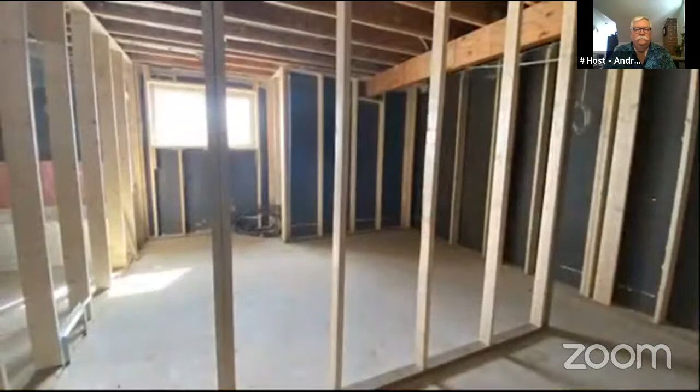The mechanical features that make this into a net zero house include primarily the building envelope itself, which includes extra insulation, a total of R34 insulation, a combination of R24 fiberglass insulation plus a foam insulation exterior to the house.

There's also an AeroBarrier sealant sprayed on the inside of the house to help keep air loss down to the barest minimum. I believe it's something like 1/10 of what the standard is for a house of this size.

There's also active solar generation on the roof, creating 16,000 watts of energy, which helps to power the electrically powered air-sourced heat pump, which heats the house as well.

The windows and doors of the house are also enhanced. The windows themselves are triple pane, gas filled and low E, so they don't allow a whole lot of heat loss or excessive heat gain through sun. The doors as well are triple point sealed so that they can prevent the most amount of heat loss.

Now let's go downstairs and check out the mechanical room, and we can see all the different systems that make this house net zero.

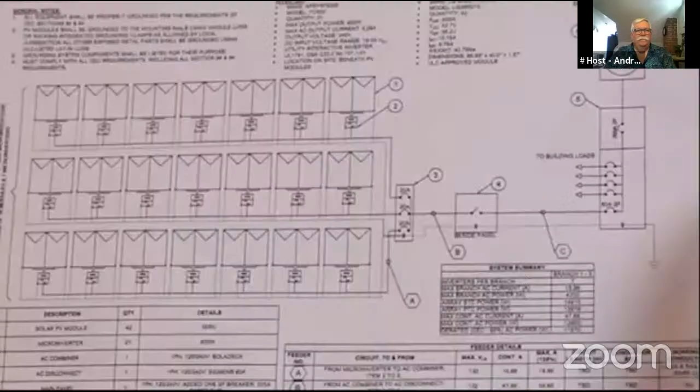As mentioned before, the house is powered by a 16,000 watt solar array, which has its own microinverters on it, so it can feed power directly into the house so that we can use it as it's being generated. This prevents you from having to buy batteries to get that off-grid usage. So you can still use some of your own green energy that you produce, but it will feed energy back into the grid as well for net metering.

The house uses a wastewater heat recovery system, where wastewater coming out of the house passes through a copper section of pipe, wrapped by another thinner copper section of pipe. So the water leaving the house when it's hot, for example when doing dishes with a dishwasher or taking a shower, forces hot water to leave the tanks, and new water coming in has to go around this, absorbing the heat from the water leaving the house, which prevents the hot water tanks from having to do too much work to reheat that water.

The hot water tanks are a hybrid heat pump system. The controller here is the heat pump that does all the heating of the water, and it uses the same technology as the furnace. It's an air-sourced heat pump which heats the water, and we use a second tank just for storage to create this hybrid overall system.

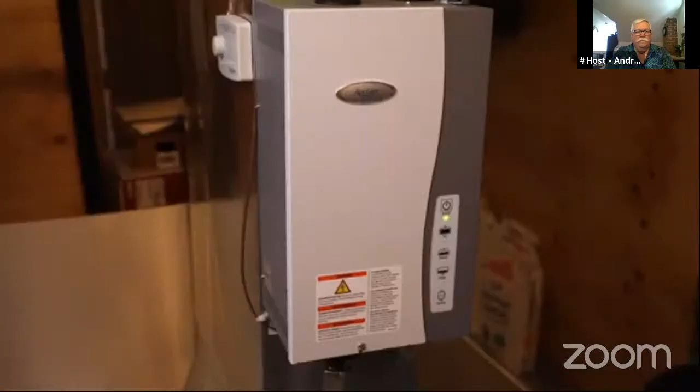For a humidifier, we use a steam humidifier that prevents us from having to heat the air as we're trying to humidify the house. That way the humidifier can run just with the blowers in the furnace, rather than having to fire up the furnace every time we want to humidify the house, which can save energy as well.

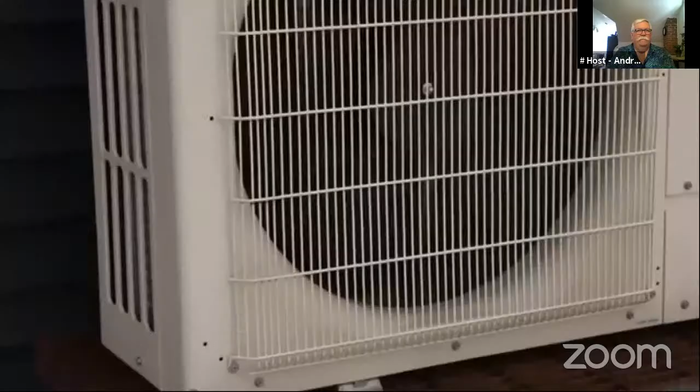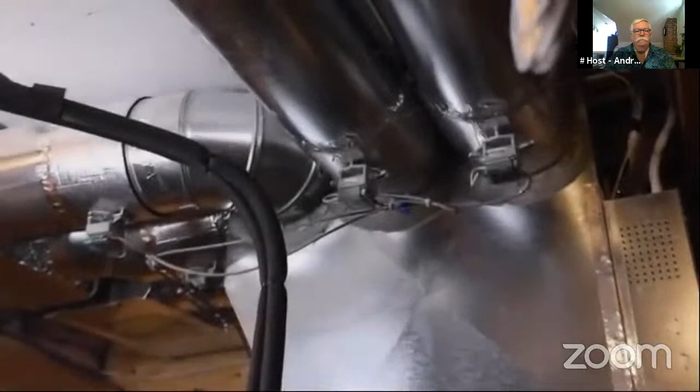The furnace itself is amazing. It's a heat pump done by Mitsubishi. These pipes run outside to a device that looks a lot like an air conditioner, and it basically draws heat from outside air using compression technology, gives those BTUs to the house, and feeds them up into the house through 3 different zones of heating to make it as efficient as possible.

With such a heavily sealed building envelope, with the aero barrier technology plus everything else that's gone into making this house airtight, you have to get fresh air in and out of the house. But you don't want to lose all the heat of the air that you've already heated up in the house. So we use this heat exchanger, this HRV unit, which draws humid, stale air out of the house and brings in fresh air, but it passes it by each other inside this unit in order to heat up the fresh air that's coming into the house. That way we don't have to heat it up again.

We put a lot of attention into the building envelope of the house to prevent air loss. For example, we have a double layer of drywall in the ceiling so that any light fixtures don't penetrate the envelope and allow air to escape out into the attic, as well as there's an R80 layer of insulation.

Another part of that is that we use a dryer that is a heat pump technology, so that it uses the same technology as the water heater and the furnace in order to dry the clothes, which is more efficient.

On top of that, it vents to this room. We didn't want to put a hole in the exterior wall, again, to prevent air from getting out. But because that air ends up in this room and this dryer needs dry, cool air in order to dry the clothes, we had to install a vent from the HRV system in this room, which will draw this humid, hot air out of the room during the summer months when we don't really want that air in the house, as well as to provide dry, cool air to the dryer so it can function the best way.

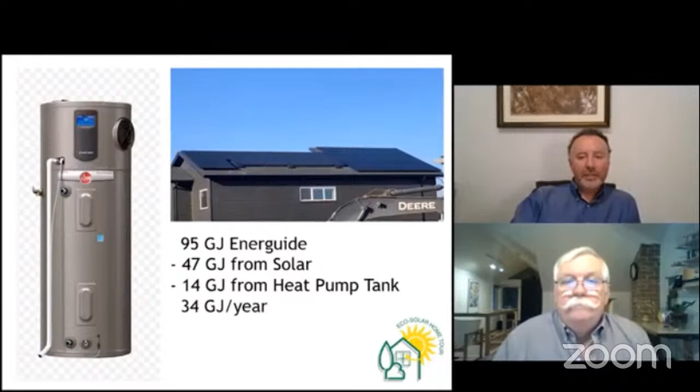We're hoping to add a cold climate air source heat pump like the Mitsubishi Zuba, and we're looking at potentially double insulating some walls as we create feature walls. That should bring us in towards the net zero point.

Okay, interesting. Let's take a look at some of the other features of your home. What would you say is the standout feature? I would say that would definitely be the solar panels.

It's quite apparent as you're approaching the house from the south side when you see all the black panels on the roof. We maxed out the entire south-facing roof - it's not possible to fit a 34th panel on there. We were keen, we have an EV, so we knew we'd have a significant electricity demand.

On a hot summer's day, or a sunny day in late June, early July, we can get up to 75 kilowatt hours in one day, which is over 500 kilometers of driving in the EV. So basically it's like getting a free tank of gas from the roof of your house on a sunny day in the height of summer.

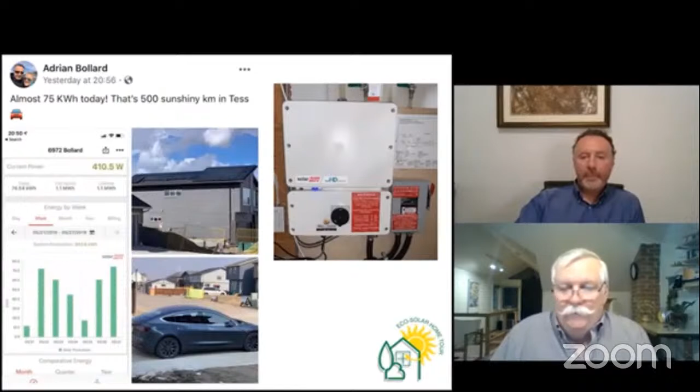Interesting. So when we build energy efficient homes, we make a series of choices. What would you say were the main choices you made as far as energy efficiency in your home? The likes of triple glazed windows was something we were keen on.

That was one of the reasons we moved forward with Excel Homes. They put in the NEMA 14-50 charger in the garage for us, added extra insulation in the attic, and we put in underslab insulation, which they didn't do as standard practice. We also put in double cellular blinds, which I'll come to - that really adds to it, almost doubling the insulation of the triple glazed windows.

And there we can see Skyfire Energy installing the solar panels. That was a couple of years ago at this stage, still pretty early in your housing development there.

Exactly, yeah, actually it's been really built up in the past six months. It's amazing just how much development's been going on around us.

We have a 4-inch air filter in the furnace, which really helps make sure the air is dust-free, and it's almost HEPA quality, the filter that we've gone with.

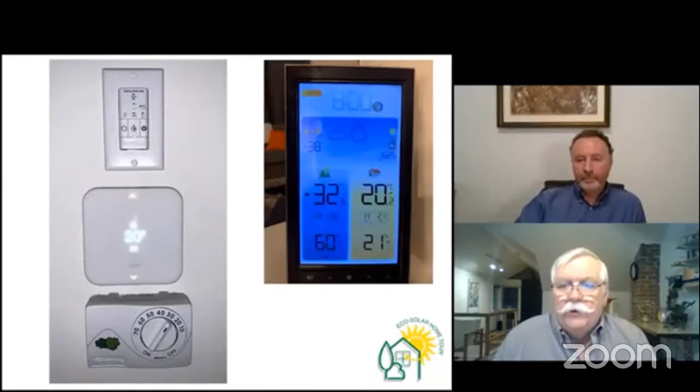Interesting. Another important area for savings is water costs. Are there any features of your home that save on water costs? Yeah, the builder supplied a very efficient toilet - it only uses about 3 liters per flush, and they work really well.

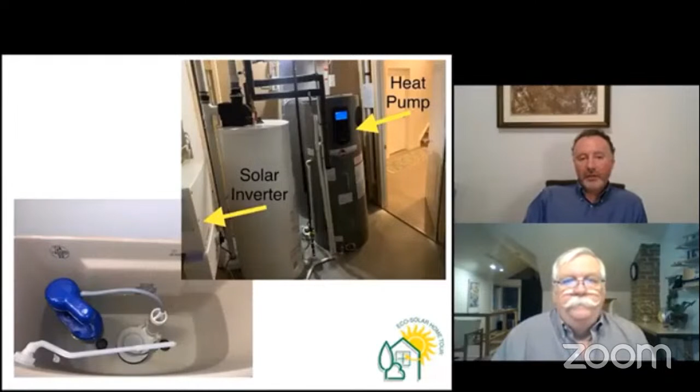On the heat pump hot water tank, we have a preheating hot water tank which really accounts for like 99% of the hot water heating. That's scheduled to work during peak solar hours, and it heats the water to 60 degrees Celsius before it goes into the traditional gas tank.

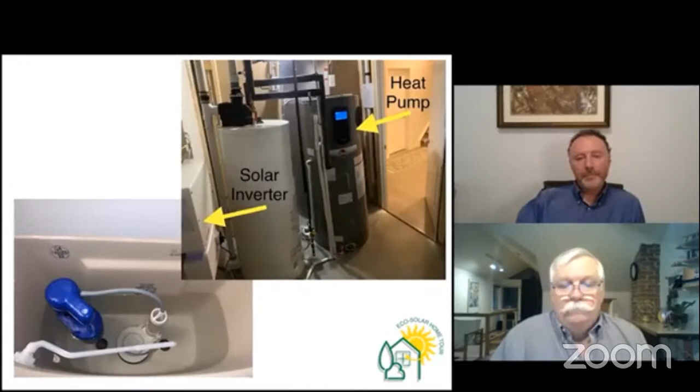That really rarely has to kick in because it's getting hot water that's already near the temperature it's set for. So the vast majority of our water is coming from the heat pump hot water tank, which in turn is solar powered.

Are there any other features of your home you'd like to tell me about? Sure, one of the easiest things people can do is add honeycomb cellular blinds. They add a value of R3 to a typical window, and we have triple glazed windows behind that, so we're really up to R6.

We added some PVC stripping to the sides to make sure the blind was as airtight as possible, which also helps reduce condensation building up on the windows behind, because there's not a flow of fresh, moist air getting in behind it. It's relatively cheap, and it's one of the best ways to control what was basically a window, the soft spot in any exterior building envelope.

When you can add something like a honeycomb blind, it's really an easy and efficient way to almost double the insulation value. I could use some of those in my home. Yeah, highly recommend them.

Another product we added, you can pick one of these up at Home Depot or Lowe's, is just a window blind that you can add to the glazing of your front door. They come in all the standard sizes that window glazing comes in. The door was traditionally just a double glazed window, but by adding this blind, it comes with its own Perspex glaze layer on the inside as well.

So we're really making the double glazing triple glazed, plus we're adding that blind layer, which, if you close the blind on a minus 40 day, creates another air barrier where you've got two levels of air before you get to the double glazed window.

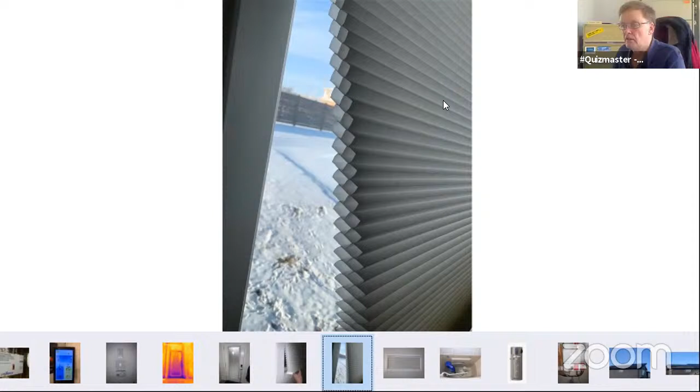I'm always quite fascinated with blinds. Did you put them on the inside of the window, I guess, then, are they? Exactly, yeah.

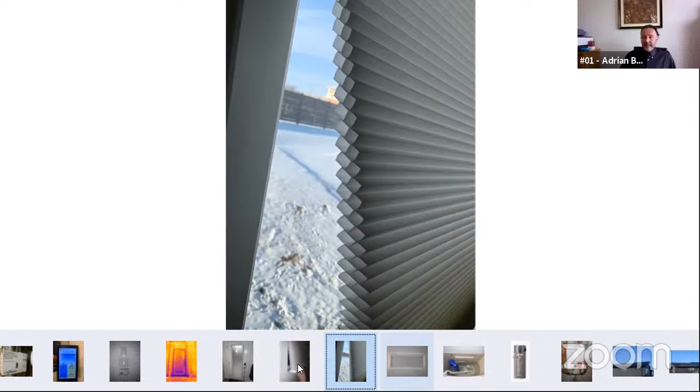How do they respond to high humidity levels in the wintertime with respect to condensation, ice, frost buildup, potential ice buildup causing them to stick, things like that? Well, there's two ways of dealing with condensation on windows and blinds. Number one is to open the top and bottom to let a warm airflow get to the window to keep it warm and less likely to condense. The other way is to make it as airtight as you possibly can behind the blind.

We've decided to go the airtight way, so on a -30 day, we can keep the blinds fully closed. We sealed the top side with tape, and sealed the sides with PVC stripping — maybe a 5 mil and a 3 mil size, whatever size we could make fit, and stuck it in at the sides. If you look at that blind in the screenshot, you can't see any air pockets getting behind the window blind, and there's only a minimum amount of air behind it, so you get very little condensation on the window. Any condensation there will condense, but it's not being refreshed with more moist air on a consistent basis, since the air is blocked out. So you either go with open blinds or seal it fully, and the sealed-fully approach actually works really well, giving you the full insulation benefit on the very days you need it.

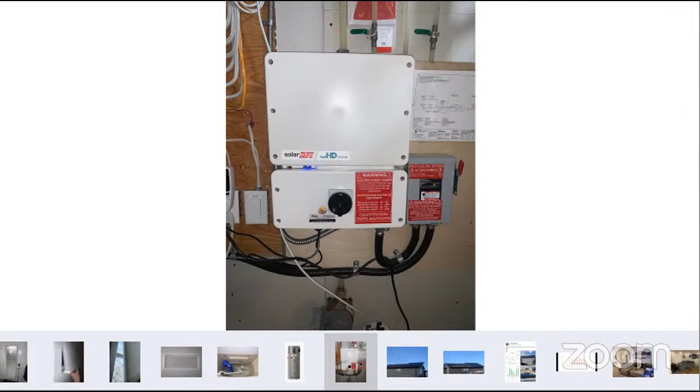Sure. Basically, we're with a solar club with our provider, Camrose Energy, and the solar club is fantastic. It gives you 26 cents a kilowatt hour when you're exporting over the summer months, and we export for 6 months of the year. Then for the winter, when we start net importing, we go down to a lower standard rate of 6 cents a kilowatt hour. So this really helps us build up a surplus in the summer, and our electricity bill can actually fall to zero in the middle of the summer.

And that's including charging our car to run maybe up to 4,000 or 5,000 kilometers a month, heating all our hot water, and running the house. We have a bill of zero from all those different charges that a typical household would have in terms of gasoline, natural gas, and electricity. Which is great.

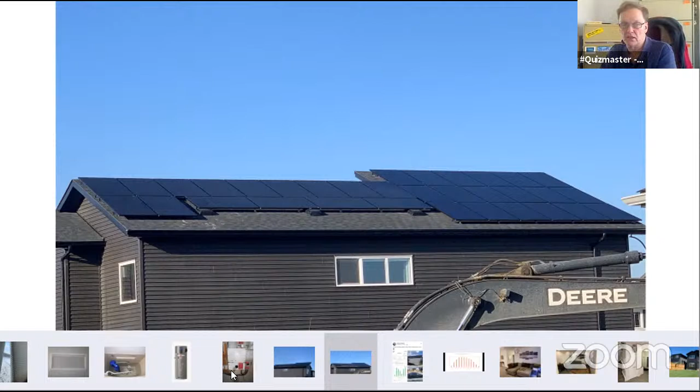So one question came in: when you were talking about your inverter breaker, does that mean the inverter breaker for the calculations is considered a supply at 40 amperes and also a load at 40 amperes? I'm no expert in that, but as far as I know, it's just a 40 amp breaker that goes to the SolarEdge. I guess that could be 8 kilowatts going out onto the grid from the inverter, or if you had that EV charger connected to it, you could be drawing the 8 kilowatts from the SolarEdge. So it's just using that 40 amp breaker on your panel if you're restricted on your panel.

That's a good point. So my response to that question is yes, that's what it means. It can be considered a supply of 40 amperes at some point and a load of 40 amperes at others, and then we would consider them separately in terms of doing the calculations, which is fine. It's not hard to do at all.

I do have one more question, if I may. It says, can you upgrade a 30-year-old house, and how much would it cost to upgrade, especially the solar electric system on the roof? Is there any subsidy available? Do you have a response to that at all?

Yes, certainly. The federal Greener Home Grant that just came out is offering up to $5,000 towards a solar system install, so that could be applied against all the costs of putting it in. Even a 30-year-old house probably has a 100 amp connection, so from that perspective, it's unlikely that you necessarily need to upgrade your panel if you already have a 100 amp connection.

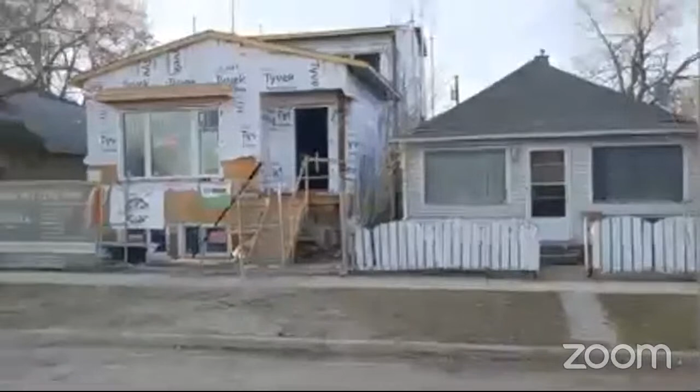If you look behind you here, this is our school, which is kind of our main view. They're currently facing south. We chose that to try to have constant south exposure for solar, and we're hoping the zoning keeps anything from being built here in the future that would block our sun. As you can see, the two units are staggered. The front unit is where my mom will be living, and we've staggered it so our back unit is higher, so we both get solar capture.

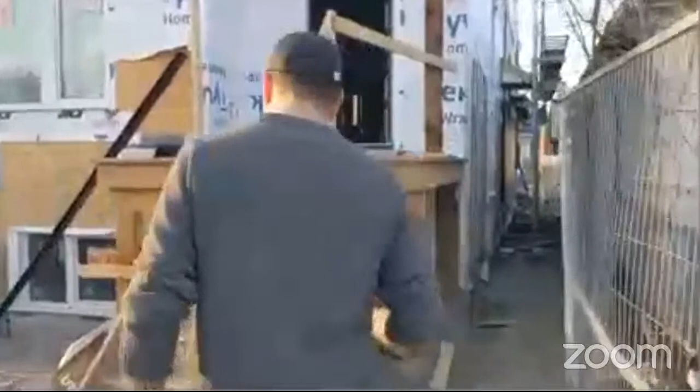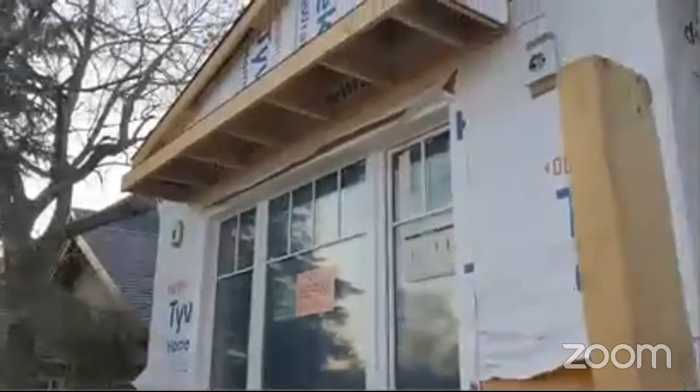So you can see here one of our awnings, for some shading during the summer months for these big south-facing windows. Here we have an Innotech door. This has a multi-locking function so we can get a tighter air seal. We're going for passive house low energy certification, so that means we have to beat 0.6 air exchanges as well as some energy use guidelines.

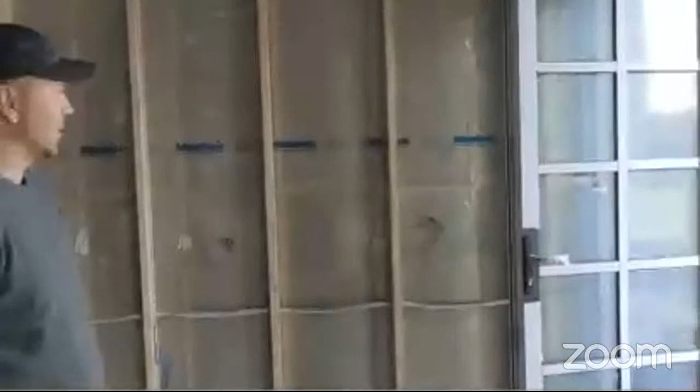Over here we have the Innotech temperate climate passive certified windows, I believe they're called. This one opens for some passive cooling. These are the main south-facing windows.

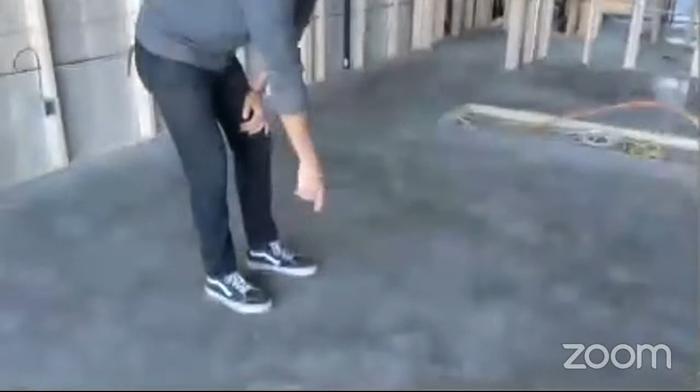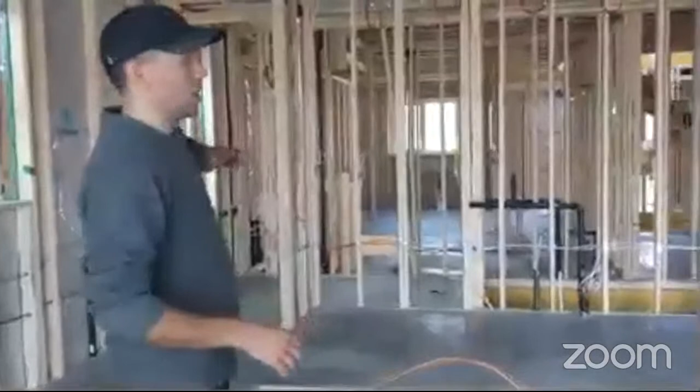That front, south-facing unit will be heated through here and soak into these concrete floors. There's concrete floors on every single level throughout the entirety of the house. This area will be her living room, kitchen, and a water closet. We've designed everything in the house so the main solar capture areas are where people spend the most time, to get the best efficiency out of passive lighting and make the spaces a little more enjoyable.

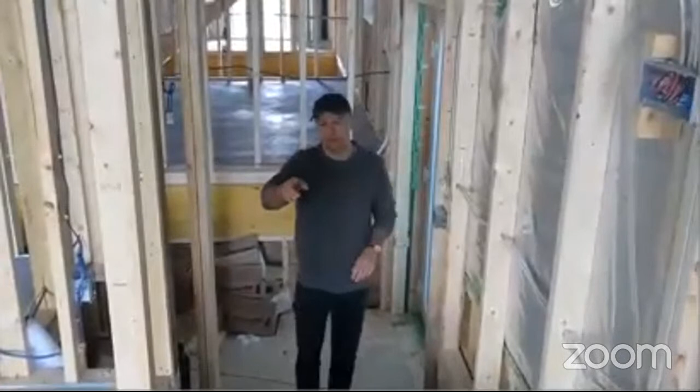So if you come with me, this will be her main entrance. That's gonna kind of be a deck area, but we have to have a front door for the look of the house. But this will be the area that she uses the most to enter.

So we have a closet here, again another Innotech door. We've separated the doors so that our unit to enter will walk down that way, and her unit to enter will walk down this way, just to give us a little bit of privacy. Because the privacy for us as multi-generational living is fairly important.

So this is where you kind of get into our unit. Luckily there's no drywall here, so we can see that right now. But as I walk you down here, we're gonna be walking down these stairs, then through the basement, and then we'll be coming up those stairs over there, and then going up those stairs to the top, just to give you hopefully some degree of understanding, since you can't be here in person.

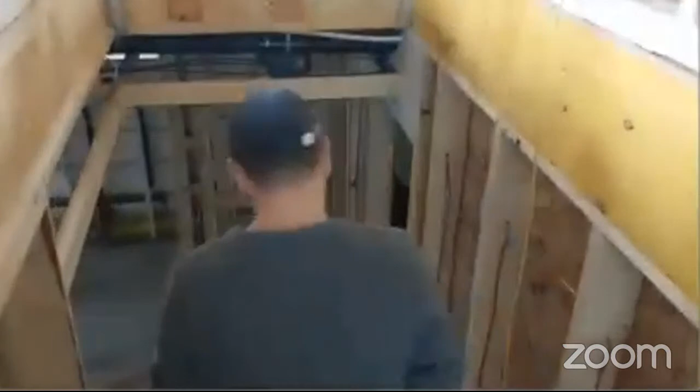So if you come on downstairs, this area here will be her main bathroom.

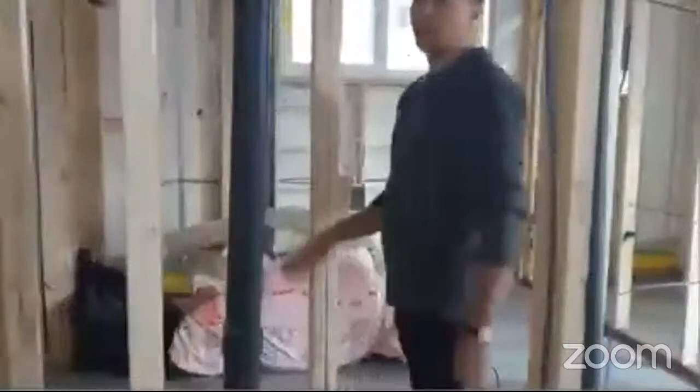And over here will be a mixture of a spare bedroom, an office, and potentially another TV room. So we tried to make some of the areas multifunctional in order to save both on the materials as well as the cost. So any area where we wouldn't be using more consistently, we tried to make into a multifunctional room. So that one's kind of hers, as well as the storage space and office over there.

This is her master bedroom. So again, with the passive lighting, anywhere that we would be spending quite a bit of time, we've tried to have on the south side of the house, or at least have a little bit of extra passive lighting. This area also solar captures for her, and then this will be her walk-in closet area.

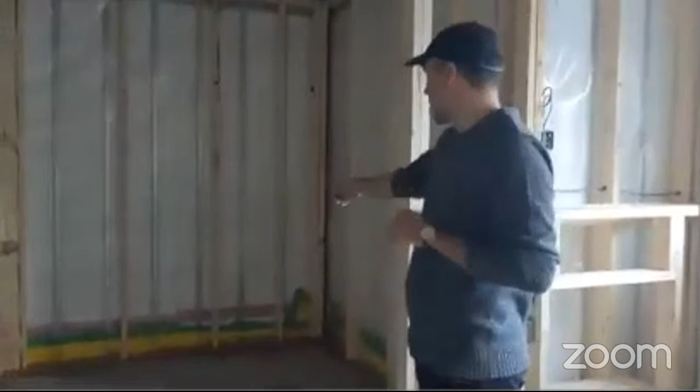And then if you come this way, so in here we have a shared utility closet. I'll try to move into an area maybe where you can see me a little better. So we'll have a shared utility closet here.

That's to reduce some of the costs for some of the expensive things. So we'll have a Sanden hot water, heat pump hot water tank, I believe, here. That's gonna feed both units for hot water. It's got a little bit better energy usage out of it. We have Lifebreath HRV.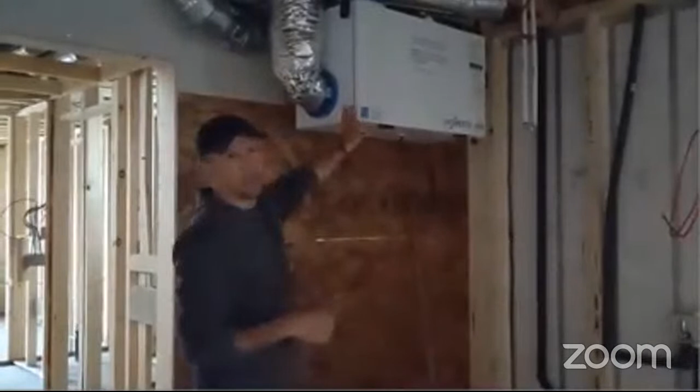This unit feeds my mom's area. We have one over there as well. And then a shared electrical panel. So this will serve as a storage room, potentially a workout room, but also a shared utility closet.

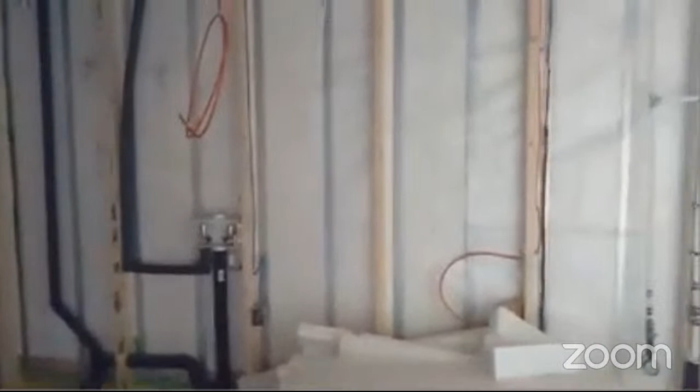We'll have a shared washer dryer here with a ventless dryer because we can't vent out of the house for the passive house design. And then this will be the sound insulated wall right here. And then our solar hookup will be over there next to the panel.

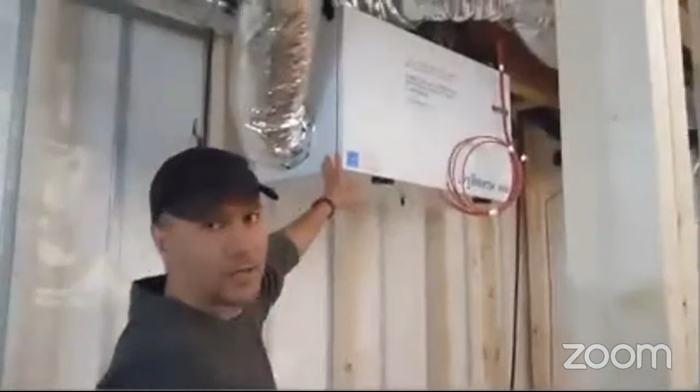Nothing too exciting down here, except for I'll show you the wall system here, which is the real part of this house. Now, Axel has another much more professional video surrounding this, but for now I'll just give you a brief description.

We go to the structural component. Everything is structurally on the outside of the house so that we could keep better thermal, or keep thermal bridging from happening. And then we go to a timber frame.

This has 3 studs. So this is an internal utility stud. This is the actual structural stud. We have blown cellulose in the walls here, and then another stud on the back of this. But again, yeah, Axel will have a much better video on that portion in a little bit here.

So if you continue with me upstairs.

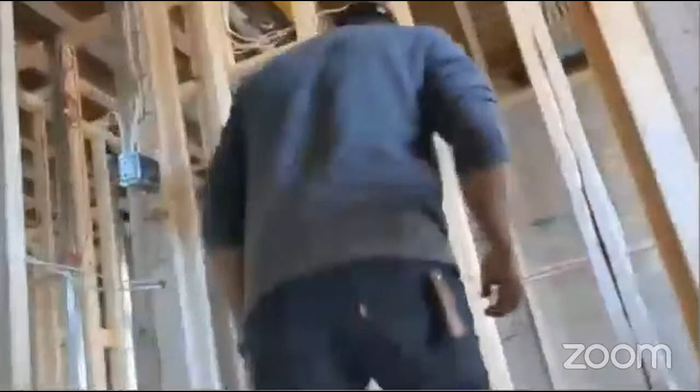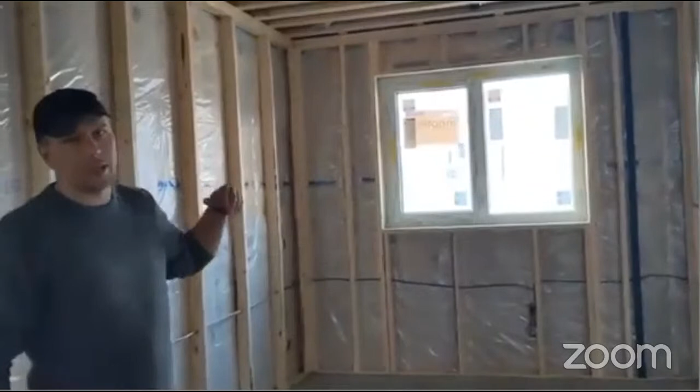So again, concrete on every level. We're kind of back where we were before, but this will be our master bedroom. We have a north-facing window here to get a little bit of passive lighting, so we hopefully can use a little less light.

Everything in the house, there's no gas hookup whatsoever. So everything will be electric throughout the entirety of the house. So we've tried to be cognizant of where we put windows that provide us some lighting.

We also have a window here that opens to get some passive cooling throughout this area, since we'll be sleeping in here. And then you have our master bathroom over here.

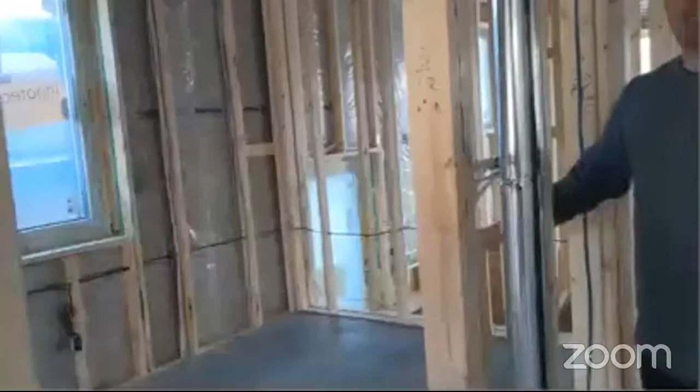Nothing too exciting in this area. And then over here is our spare bedroom. We'll also be using this as a closet, though this has been kind of planned for a closet later as well in our master bedroom. But this area has been planned for a closet as well as a spare bedroom because, again, any areas where we wouldn't use as often, we've tried to make multifunctional.

So if you come to our entrance here, currently you're looking at me south. We're going to be spinning to the north. So we'll be entering through the north of the house. This is our main entrance for the back unit.

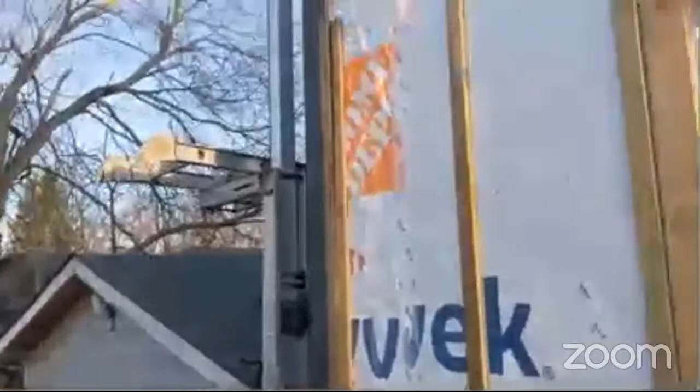And out here we have, again, another Internorm door. Here we'll have all the rainwater from the entirety of the house captured off of the roof systems. It'll be piped down through the side of the house, and then it'll come into some water barrels or water cubes that sit on top of our deck here. And we've raised it on the deck to get a little bit of pressure to feed the garden from it, using kind of gravity fed systems.

So this area back here will be a mixture of a food garden and native vegetation to try to reduce the amount of water or allow us to actually make food for ourselves. But this will be a shared area for the front unit and the back unit. And then if you come inside, we'll go up to our top unit.

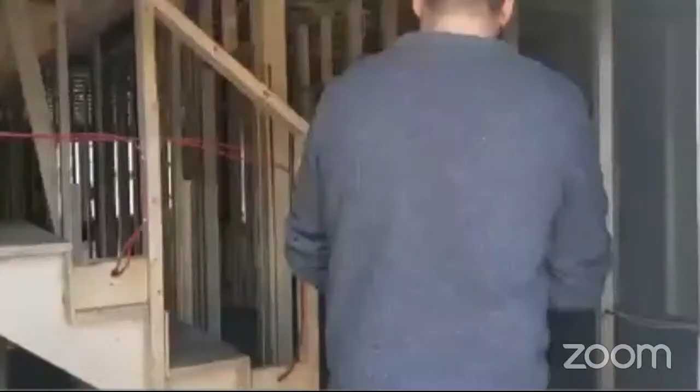So again, everything up here is timber framing with blown cellulose. We have concrete floors, and this area is going to be our main solar capture area. So that's why we have these big south-facing windows.

So this will be our kitchen over here. That window doesn't open. We have a water closet over there with a window that does open. And then we have a window that opens here and a window that opens here, again to try to get that passive cooling.

You can see here the tilt and turn function of these Internorm windows, so we control the amount of passive cooling that we get. So this one and that one.

And then if we go out onto the deck here, you can really see the staggered design here because this is my mom's roof.

And now I'll take you up to see the area where the solar is planned. So hopefully I'm getting the right shot here, but you can see now this area up here, the peak of the roof has been set back so that we can get as much south-facing slope as possible.

So that entirety of that roof will be loaded with solar panels, and then this east side will be loaded with solar panels. In total, it should be about a 15 kilowatt system, we estimate right now.

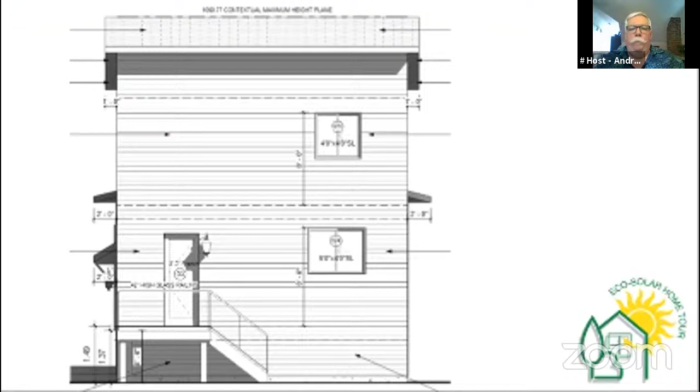Yeah, that's right. Sorry, I think my video's off, Andrew. I think I need... it'll come. Somebody has to do that for you. Gotcha.

This is really interesting to me. We've only seen this once before on the tour, in Edmonton last weekend. This is a special type of basement construction with steel studs and styrofoam. Glenn, do you want to tell us what that is, and please define the acronyms you're using?

Still says my video's disabled, but Axel's here with me, so he can get into the technical. So what's this system called? That basement system is the SI foundation system. I believe SI is for super insulated. They're out of Edmonton, and that wall is an 11.25-inch thick wall system.

There's 6-inch structural steel studs to the inside face of that wall, so there's an added 5.25 inches of EPS on the outside of that stud face for a complete thermal break through that wall system.

So the benefits of this wall here are not only from a greenhouse gas, or GHG, target, but we don't use any concrete in the wall here — it's just in the footing. So that's a lot of concrete to not be pouring in your house.

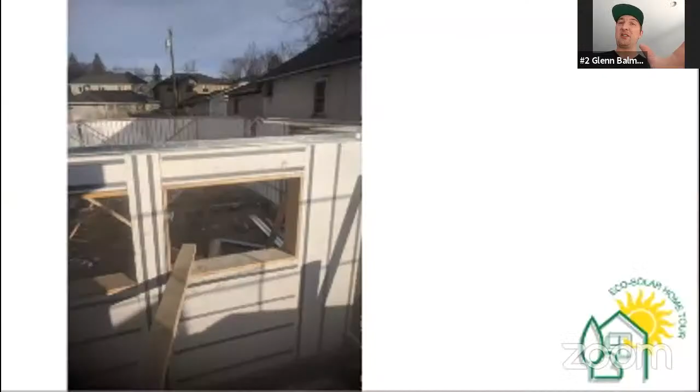Also in terms of a space saver, the 11.25 inches is entirely made up of insulation other than the structural steel studs. Having an 8-inch site-cast foundation wall, you lose a lot of space with very minimal R-value with a typical foundation wall there.

On the picture you're showing, on the outside of the wall you get these little PVC nailing strips, and those nailing strips are to help side your house with.

Now, how do you seal this foundation — this expanded polystyrene — how do you seal the sections together?

So the sections come in 4-foot sections, basically just like great big Lego blocks. There's a steel track that gets bolted to your concrete footing, which has to be poured extremely level, because you're playing off the level of that footing. That's one of the tricks to the process — pouring a level footing.

So you bolt a metal track to that footing, then put the panels into that track and screw right into them. That connects the bottom, and then there's a Z track that goes on top of the wall. This Z track fastens to the front face, and a 2x6 goes into that Z track and fastens in, and your subfloor gets attached to that 2x6 sill plate on top.

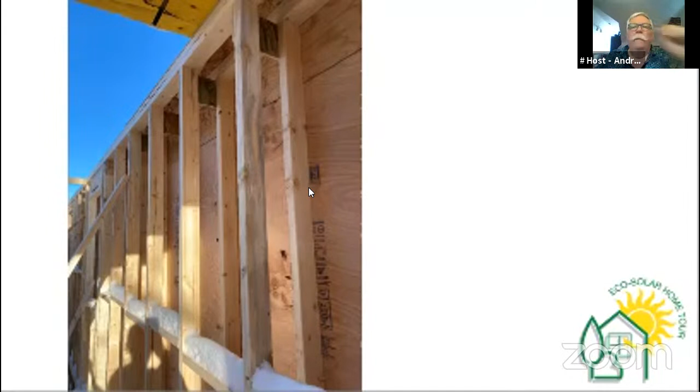That allowed us to have our floor system structure stop at the interior double studded wall, and at our floor system on the basement, there's just a great big foam block that went around the entire subfloor. So right from the footing all the way up to the roof, we have continuous insulation, and the only part that carries over was the floor sheathing. In terms of a really solid thermal break within this house, this one provided that for sure.

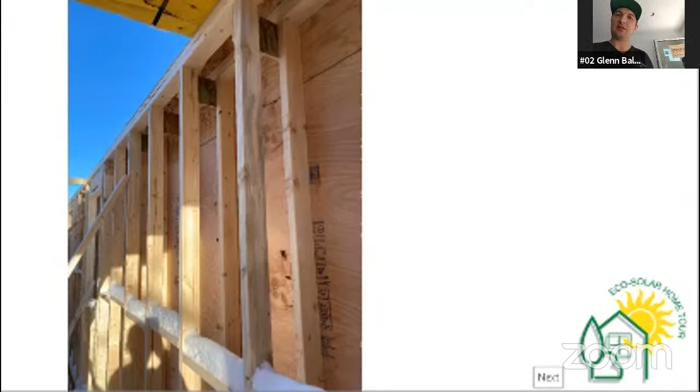Okay, so here's a bit more of the structure going in. I can see the double stud walls around the outside. Yeah. And then this is — oh, sorry, this is — yeah, go ahead.

Well, I think you probably have a picture of the insulation coming up here, correct? I do, yes. This is the exterior, just in process.

That's across the road in the schoolyard, is it? That's right in front of our house. Oh, it's on the boulevard. Schoolyard past that, yeah.

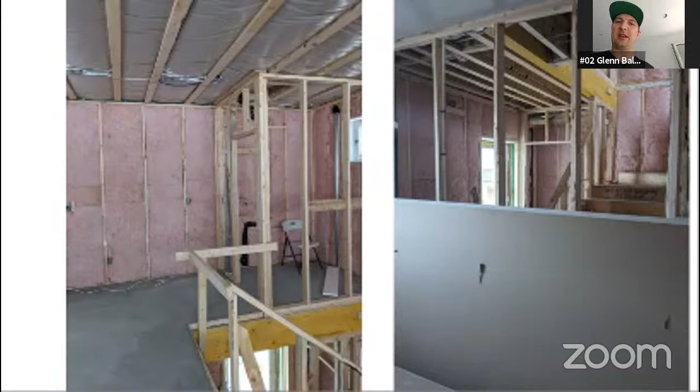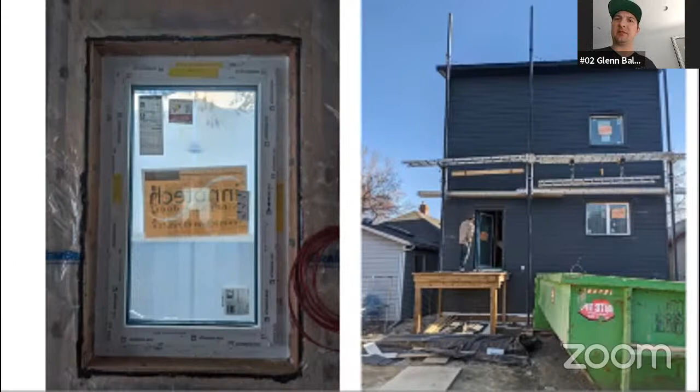I see, yeah. Here's some window pictures. In that ceiling there that you can see, we strapped the ceiling out as well. I see, on that previous picture. We're going to get a better picture of that in a couple of pictures, so I'll come back to that. I have a few questions about that.

Here's some window pictures, this again is that north wall of the house. Then that you can see there, that's our Innotech window, great window to work with. We really enjoyed those, and especially for the price point for what you're getting there compared to some of their competition, I thought was great. And...

On that window there, we used a dymonic caulking on the inside, and then we used vapor-open Siga tape on the outside to air seal that. And then we over-insulated the frames, which you don't see in that picture there. Probably a little later, yeah.

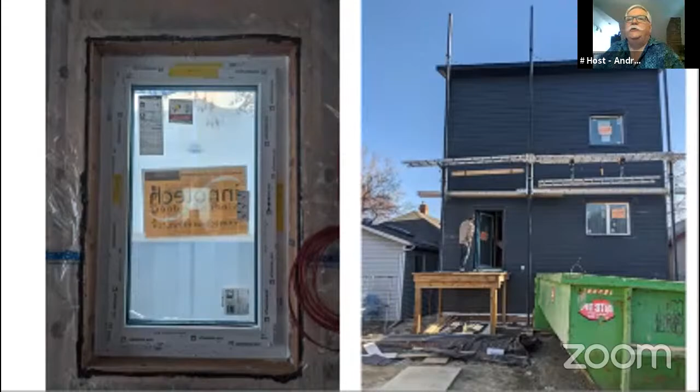All right, now this is your air barrier, tell us a bit about this. I've not seen this particular brand before, so tell me more about how this works. So that air barrier and vapor barrier you see there, that's the CertainTeed MemBrain, the smart membrane, in that it will be vapor-open to the inside if the relative humidity within that cavity space reaches 60% or above. So with a thick wall system, if you ever have any moisture issues, this will help dry the wall out to the inside. And obviously the wall will be drying out to the outside as well, but it just gives you a bit more dryability within the wall system.

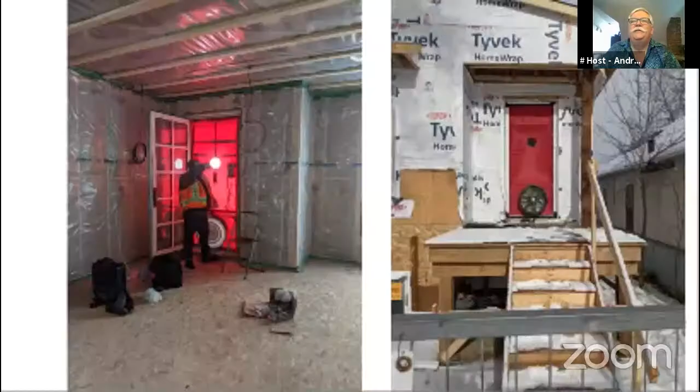That's very interesting, I would be very interested in figuring out that technology. All right, so here's the blower door test going, I've got a couple pictures of this. Tell us about your air changes per hour on this home.

So the air changes, we finished off with our pre-board air exchange here of a 0.45. Obviously we're yet to get our final score once everything's done, but the way this house was air sealed, we're probably not going to be looking at too much different than a 0.45 in this house. So that was our air exchange score there.

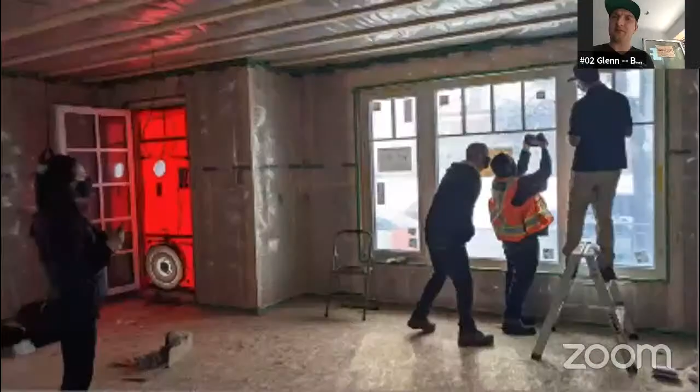So now this is a good picture showing the ceiling, and this is on the main floor. So what you're doing is you've actually put the vapor barrier up, and then you're building another, what do you call it, utility studs inside of that, so that you can hang the drywall and do the electrical. Now is that just to maintain your air tightness? Well, in this house we were trying to not allow our mechanicals to be outside of our envelope, we wanted it inside, just to give us that added protection from harming our air barrier.

Right, yeah, so stick with me here on this question for a minute, because I'm actually going to start asking you about the thickness of your wall. So you have a 12-inch double stud wall for your insulation, and then on the inside you have another 2x4 set of studs that's used to hold your drywall, and you've got another 3.5 inches of insulation on that. And then on the outside you have your plywood sheathing, then you have strapping, and then you have your siding on top of that. So this wall must be 12, 14, 16 inches thick.

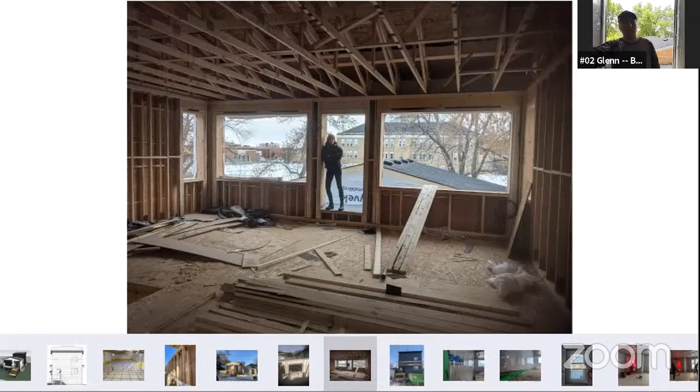You need to let our listeners know what PHPP means. Sorry, that's the modeling software, the Passive House Planning Package, that they use for actually modeling the Passive House design. I think it's a spreadsheet, isn't it? Yeah, it's like a very complex spreadsheet that's pretty, if you're a nerd, it's pretty sweet. Apparently from what I hear from Kevin of Nickel Design, it's so accurate that they basically input the numbers you've planned, and as long as you have photo representation that you followed that model, it's so accurate you don't even have to do testing afterwards to get your certification.

It's really good to see how Passive House Standard is being used more and more and combined with PV to get to net zero at the same time.

Another question from Donovan, I hugely appreciate his questions coming in, he's really keeping track of things here, which is great. He's asking: can I ask if community solar and virtual net metering is available in Calgary? The Passive House Standard allows this for off-site electricity production being credited to one's electric utility account. I would jump in and say that we have net billing in Alberta, we don't have net metering. But because Passive House permits it, that's okay. Off-site electricity is never credited to our electricity utility account here, which is fine. Do you have any comments on that? No, that sounds like you know better than me.

Okay, my question, Andrew here, I'm just going to throw in, we've had a couple of discussions about service size to new homes. What is the electric service to this home, Glenn? 200 amp. It is 200 amps. And that would have been an upgrade to that site from previous. Do you have overhead power lines coming to the back of the house? Yeah, it's an overhead service here, correct. Okay, that's usually easier to get an upgrade to 200 amps on an overhead service. Usually.

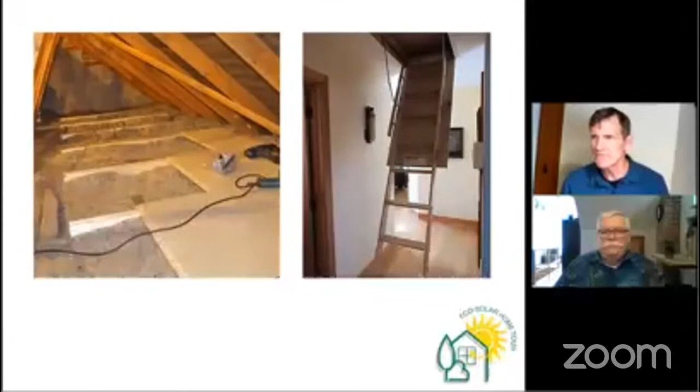At the same time, we were trying to make a pretty small house work for 4 people, so we're really conscious of space. Here we extended the ceiling joists and put planking down in the attic. Now this is unconditioned space, so it is hot and cold up there, but it's used for things like Christmas decorations or seasonal tires and things like that. So making use of every square inch. We installed this drop-down ladder to access the attic. The point I wanted to make, just to make the house work, it meant making sure that every square inch of the house is being used.

As I mentioned, new stucco on the outside of the house, new windows all the way around, all double paned, low E, gas-filled windows. So the house went from being basically drafty all the time to being in a situation where it is probably too tight, too airtight to actually be healthy - buildup of humidity and so on.

So we installed a heat recovery ventilator, a fairly small one. This one's a Fantech, and it's pulling from downstairs around the laundry room, downstairs bathroom, and then the intake, fresh air from outside, is just fed into the plenum of the furnace and distributed through the ducting of the house. So always a little bit of inside air being taken off and a little bit of fresh air being taken in, with some heat exchange in the process.

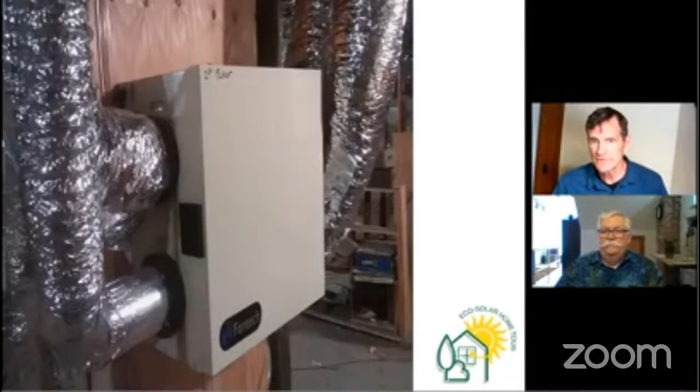The other thing I mentioned, the windows - all the windows were changed. The old windows, Andrew, I don't know if on your place you remember the old sash and pulley type windows, with ropes and pulleys.

Yeah, I had those. So terrible for efficiency, lots of leaks, single pane. I remember that - I remember the curtains moving on a windy day, it was that drafty up here. Yeah, so they had to go.

But the thing about the old windows is they were wood, and they had the mullions, the little wood trim, so it looked like an old house. We were able to get new windows with fir trim on them as well, and they actually look very similar to the old ones that we took out, but way more energy efficient.

The other thing is even just adding drapes and window blinds - these are Hunter Douglas honeycomb blinds. I suppose in retrospect I might have gone triple pane, which was not that common when I started this renovation. But I think even things like window blinds, reasonable cost, but huge difference. On a really cold winter night or a really hot summer day, they make a huge difference.

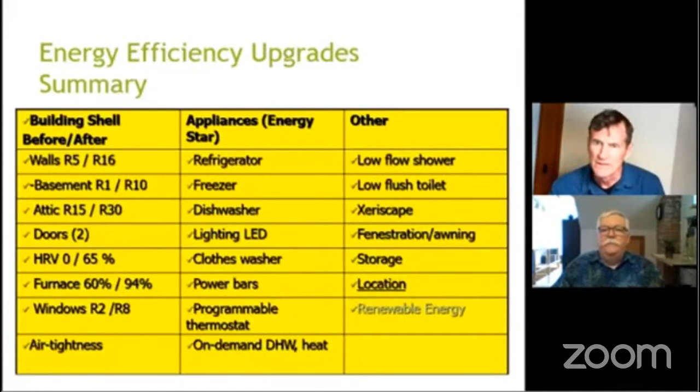Interesting, very interesting. So I won't say I'm net zero, but just keep working towards it. Andrew, you and I had this discussion the other day. I originally, when I was in the business, solar was quite expensive, and I now have it on the house. But 15 years ago, I might have said, well, why would you spend $10,000 on solar when you can spend half of that on energy efficiency, say insulation, and get twice the energy savings that you would from solar?

Now, 15 years later, it's not quite so simple. Price of solar is 90% less than what it was even 15 years ago. So I don't preach that like I used to. I would sort of question why you'd want to spend that much money, but now, thanks to the price decreases and the improvement in technology, that renewable energy component is pretty attractive. And sure, energy conservation still counts for something.

Energy efficiency, I know, an old home like this, it's kind of like why are you putting solar on the roof if you've got the wind blowing through the cracks in your windows, kind of thing. But now it's pretty convincing actually in all these areas. So we might, I think we could probably give renewable energy a bigger circle. Yeah, exactly, oh, and here it is.

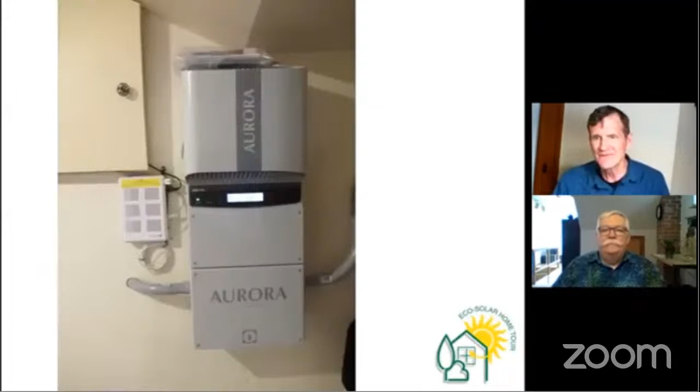Were there any other features you wanted to highlight on your home for me today? I think probably one I didn't mention is just location. I don't have an electric car or anything really exciting like that, but it is inner city. I'm walking distance to downtown, it's an easy bike ride to work, and so I think location counts for a lot. It's a kind of cool, hip inner city neighborhood, I have great neighbors, and really, I could get away even without a car.

So what would you say is the most challenging aspect you found when building this energy efficient home? I think the tough part in this case is buying the house and realizing there's a bunch of things that need upgrading, so it's like, how much do you want to do? This was a very real world project. I had young kids, working full time, and a limited budget and limited time, so how much time and effort do you want to put into the job? I think that's the really tough part.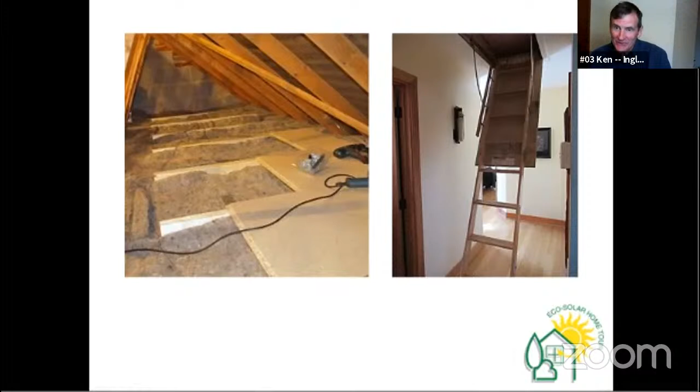There's lots of value - you mentioned being able to walk to work. What's the value of that? I'd submit it's huge in terms of exercise, less fuel costs, and less ownership costs for a car. Those are important values.

How did you decide on the combination heating system you used? I was aware of hydronic heating, but some quotes were over $20,000, wanting to do zone valves and everything. I thought surely there must be a simpler way. I even considered running just a line off the hot water tank to take the chill off the basement - low grade heat in the floor. Surely there had to be a simple, relatively inexpensive way. But at that time I was told the code doesn't allow using a hot water tank for space heating.

So when I found out about on-demand heaters on the market that do both - this particular one's a Baxi - it's really high efficiency, and you're going to need domestic hot water anyway, so it just switches between space heat and domestic hot water. That system was about a $10,000 job - there's radiators, the boiler, tubing run through the walls, tubing embedded in the floor. Some of the basement was developed so I used radiators since I wasn't able to put it in the floor. Other areas starting from scratch, like the bathrooms, I had the floor open so I was able to put PEX tubing in the floor in spaces under construction.

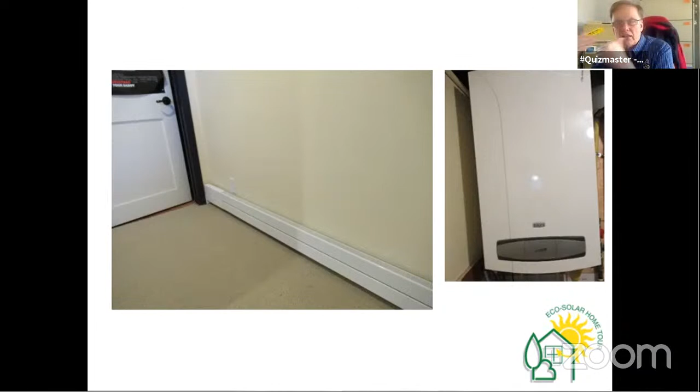We have a question from YouTube - thank you for that. Do you have blower door test results? And I would add, have you done an EnerGuide rating on this house now?

Yeah, it was really interesting. I really enjoyed that presentation before mine.

I think it was Glenn speaking about the blower door test, and I thought, oh shoot, I forgot, I never thought of that. I should have grabbed the paperwork. I know the house was super drafty, multiple air changes an hour. We're not worried about indoor air quality or excessive humidity because the house was so drafty. But I'm sorry, I don't have that number.

I did get the blower door test done, and I did add in the heat recovery ventilator, and it is necessary. With the foam insulation, stucco, new doors, and new windows, the house is tight - in fact really too tight to be healthy. So sorry, I don't have that number. Listening to Glenn there, I thought, oh, I should have looked that up before I got online.

Maybe you could provide it to us, and when people write in we could respond with that number. But have you had an EnerGuide audit done? Oh right, yeah sorry - the blower door test was part of that EnerGuide test.

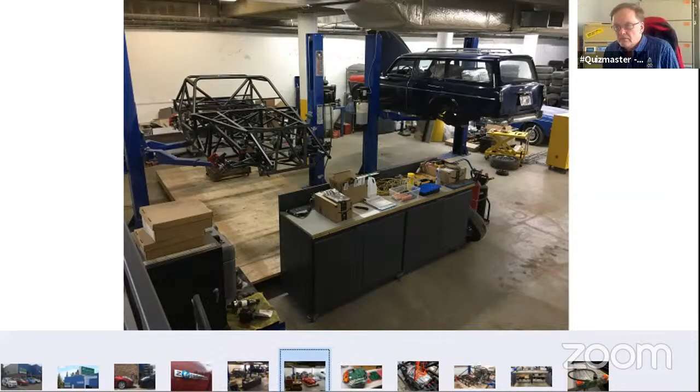Not that I'm aware, I don't think we've actually done one of those, but it really depends on the car. Bigger vehicles are somewhat easier to convert because there's a lot of space. We just had one of our friends show up half an hour ago with an electric Jeep, I think a 1990s two-door Wrangler that he converted to electric, and his first comment was that it was really easy because there's tons of space where you can put stuff. This goes for both pickup trucks and usually camper vans as well. The only limiting factor would probably be battery capacity and the range you can get out of them, but that can be solved with better batteries and more of them.

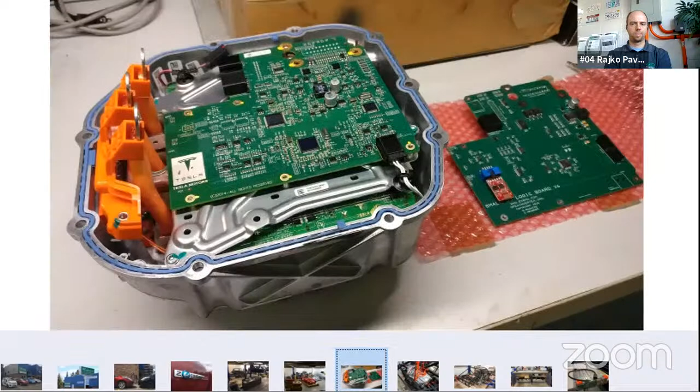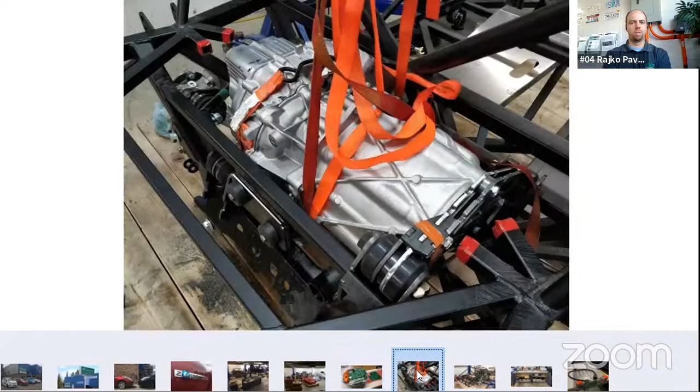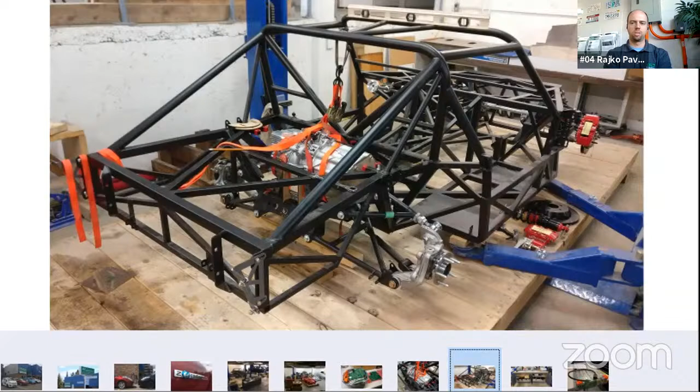So what we're looking at here is part of the Tesla motor, part of the build for the Daytona 65 downstairs. Right now the guys are working on testing the motor, and soon they're going to take the car out for a spin without the body, testing the entire drivetrain. This is the motor that will be powering the car. It's in the rear, but it actually comes from the front, originally a front motor from the Tesla Model S, or actually Model X in this case, which outputs around 300 horsepower. On this light car, this is going to be quite amazing. This is basically the entire build, you can see the motor in there, which will be powering the rear wheels.

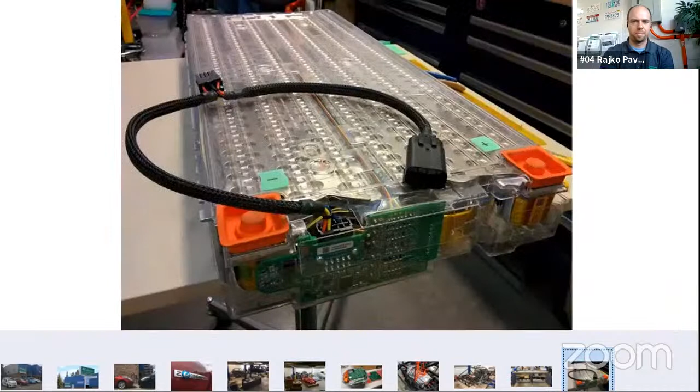And their favorite things ever, batteries. This is actually a module from the Tesla Model S and Model X. They're identical, which is about 5.5 kilowatt hours. And yeah, it's very popular for conversions.

It's a higher-end stock for batteries because Tesla batteries are one of the better ones that you can get overall. If you're looking at reliability, capacity, heating, cooling requirements, and all that stuff, Tesla batteries are one of the best to use.

There are some other ones that are heavily used in conversions for some particular aspects. For example, if you want more specific power, you would use Chevy batteries, especially from the Volt, because they output a lot of power related to their capacity. So if you don't want so much capacity but want a lot of power, those are the ones to use. But if you want overall a really good vehicle, Tesla batteries are really safe.

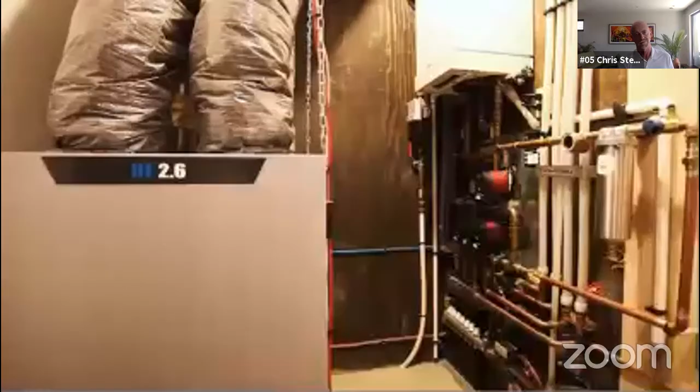We had an independent energy audit done of the house, and part of that audit is a blower door test. The technician puts this huge fan on the inside of the entrance door, and it seals about the outside of the door. The whole idea is it sucks all the air out of the house. Well, it tries to suck all the air out of the house.

So if you have any leaks, air will try and come into the house, and he can measure how many air exchanges per hour are happening with your house. Think of that - that's the entire volume of air in your house, how many times it's exchanged every hour. To give you some perspective, there was a study done in 2007 in Ontario where the average house had 7.5 air exchanges per hour.

So think about that. Every hour on a windy day, the entire volume of your house in air is changing out 7.5 times an hour. The air comes in, you heat it, and then it goes away, 7.5 times an hour. So I was pretty happy with our result, and we spent a lot of time making sure this place was tight.

So we came up with 0.17 air exchanges per hour, and that was the tightest house the technician had ever seen. So yeah, we were pretty happy with that.

I was absolutely amazed at how much time it took to complete all the other projects after the structure was built. For example, we've got the 11 camera wired security system - figuring all that out, finding the best system and then actually putting it in with wires. I don't want to go wireless. Then there was the wired alarm system.

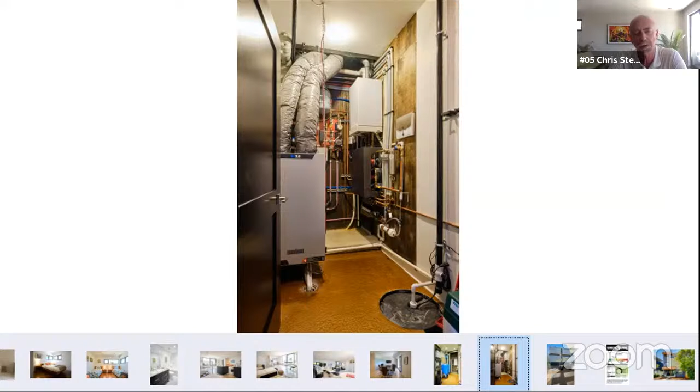The actual design, getting the development permit for the house, was a little painful with the city of Calgary, because we have fantastic southern frontage, and with any efficient building you want to reduce the surface area and windows on the north side. So there's what they call massing of the house. It's interesting because as soon as you go in there, the city says you can build anything you want, and by the end of the process you understand you can build anything you want as long as they like it. So that was the massing of the front - we didn't have enough windows and there wasn't enough contour change, which is fine, I get it, they want aesthetically pleasing places, but unfortunately aesthetically pleasing and efficiency don't always go hand in hand.

So there was a bit of a compromise where we had to have a deck on the top of the north face. It's the inset up top, and it goes along the entire length of the north side. It's a great little deck, cool and quiet in the summer - I can't say we really use it, but if it's smoking hot out, that's the place to be, it does work out well for that. But it increases the exposed surface area on the two northern bedrooms on the second floor.

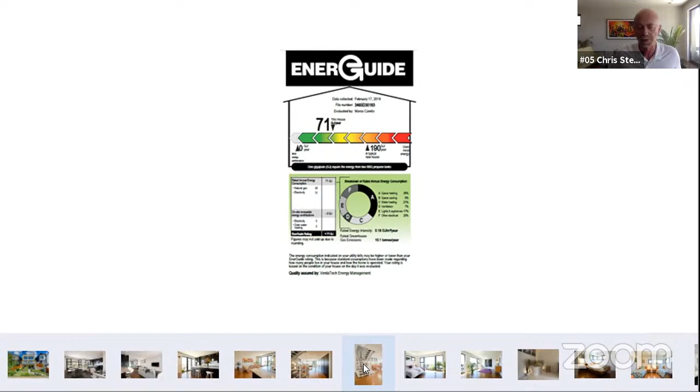Yeah, and you're right, so much of that is people's living habits as well. If any of you have teenagers, you understand how much your bills go up with all the extra showering and lights left on. There's no kids in the house, so the house is pretty lean, but we do have hairless cats, so we have to keep the temperature relatively high for them - I guess they offset the teenager quotient.

The key for EnerGuide and HOT2000 is that it evaluates the building envelope, it doesn't evaluate the people. So what they do is take a standard profile for water use and domestic electricity use, then go through the envelope and do all the calculations for insulation, windows, and sizing. But the space heating requirements of the house are a function of the building envelope only, though some of the space heating is supplied by all the electricity used inside the house.

So all the electricity used inside the house goes to heat the house, every speck of it. And all the sun coming in the windows goes to heat the house, every speck of it. So the net of what the house uses, minus the electricity coming in, minus the sun coming in, is then what the furnace needs as a supplement to what the environment will give us. For instance, my house here in the summertime doesn't use any energy for space heating because this environment provides it all.

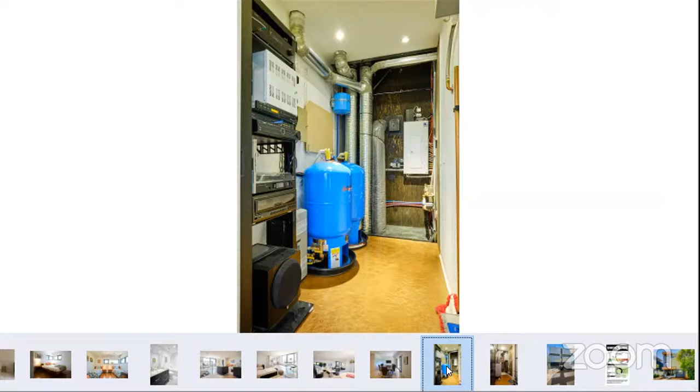Yeah, that's just a domestic hot water preheat system. If you go two to the left on the bottom there, there's two indirect hot water tanks. So the panels on the roof feed the first tank and preheat the domestic hot water before it goes to the second indirect tank, which is fired by the boiler. Yeah, so that's working out really well - I'm super pleased with that. Nice, so it's just reducing your energy input to your hot water.

Yeah, exactly. So I think mid-spring and mid-fall it works the best. I don't have them angled very much - they're almost vertical. So it will preheat the first tank to about 40 degrees Celsius, perhaps 45 on a good day, and then the primary tank only has to bring it up to 60 degrees C.

So does it work well in the dead of winter? With vertical, you wouldn't have any snow - do they actually pick up some heat then? Oh, it works beautifully in the winter. It's great because, like you say, the snow doesn't collect on them, and our sun is so low on the horizon in the winter that they're still pretty effective. We just don't have as many hours of sunlight to heat it up, but it's pretty efficient because the sun is almost directly on them in the dead of winter.

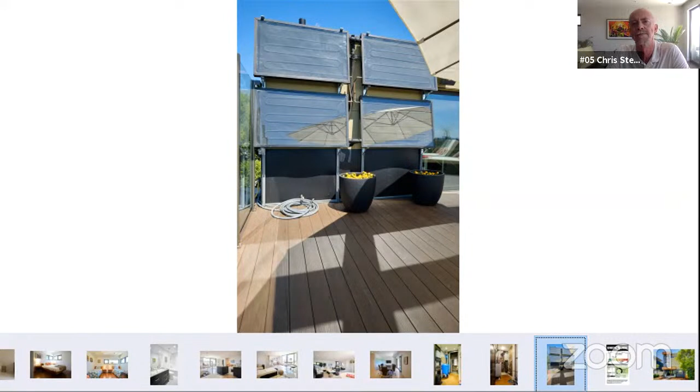The other question I'll throw out, another unique feature is your green roof on your garage. Tell me a little bit about the structure of this and how did you support the weight of this? Because usually if you put soil up there, you need quite a bit of structure.

Yeah, so these are all sedums, a product from Eagle Lake Nurseries. They were the first company we came across looking for a green roof product - there were a lot of options, but they said, okay, this is what we've got, this is how much it costs. You need to make sure you have enough live load capability on your roof to support another 32 pounds per square foot. So we engineered this in long before the garage was built, and instead of 24-inch centers, we went down to 16-inch centers for the roof joists of the garage just to support that load.

So we put an EPDM roof on the garage, with a very slight slope, maybe 3-4%. Then you place another layer of EPDM down over the entire garage roof.

Then a truck shows up, like a picker truck, with racks of these sedums in 1 foot by 2 foot containers, about 4 inches deep. You just start laying them out in a square pattern, keeping everything in these little trays - it's a mineral-based growing medium. The roots don't grow past the little tray, so you don't have to worry about roots going into your roofing material. Then you have a rock ballast around the outside to account for expansion and contraction of the trays - you wouldn't want them pushed right up against the parapets of the garage.